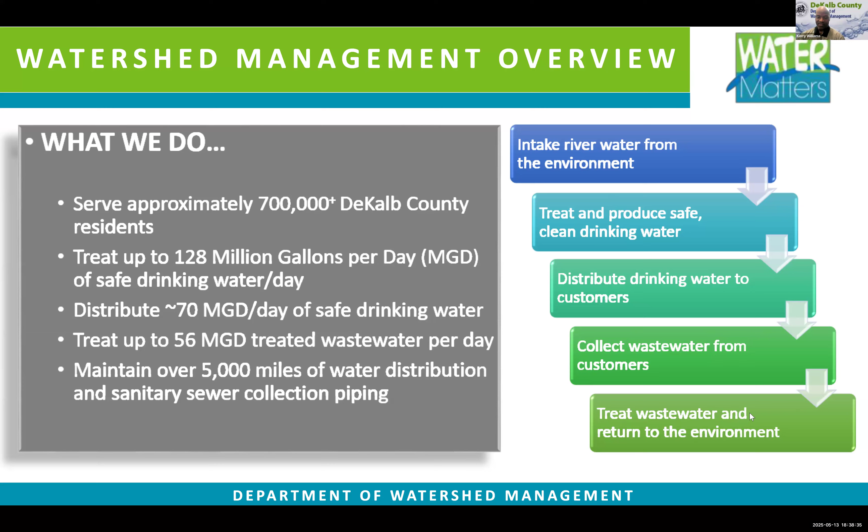This is part of DWM's effort to replace our aging infrastructure. Specifically, the pipes in this area, they were put in the ground roughly around 1957, and they have reached the end of their useful life. So we are being proactive to go ahead and start replacing these pipes in this area.

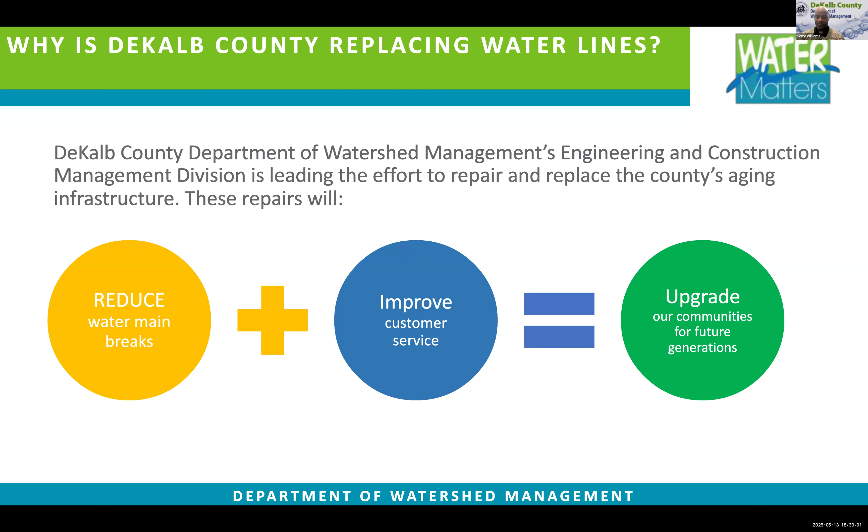To assist us, we have a team of consultants and contractors, AECOM, RGI. These help us on a daily basis in our design and construction of these projects. At this point, I'm going to stop talking. I'm going to turn it over to the construction manager, Assistant Director Ms. Cassandra Marshall. She will tell you more about the project and what we are trying to do to improve the distribution system in your area. Ms. Marshall, the floor is yours, and I'm going to be quiet.

All right, thank you, Kerry. Good evening, everyone. My name is Cassandra Marshall, and again, I am the Assistant Director of the Capital Improvement Projects for Watershed Management. My duties include overseeing the Watershed's $4.27 billion Capital Improvement Program and managing the construction management staff.

I have over 25 years of experience in construction management, and I'm supported by a team of experts also. So now you've heard a little bit about myself. I will now provide an overview of our problems with the system and our solution in repairing the aged infrastructure.

The problem is primarily due to excessive water main breaks, aged infrastructure, and operational inefficiencies. The pipe was put in 1957, and in this area, the county has been faced with over 59 water main breaks from 1989 to 2024.

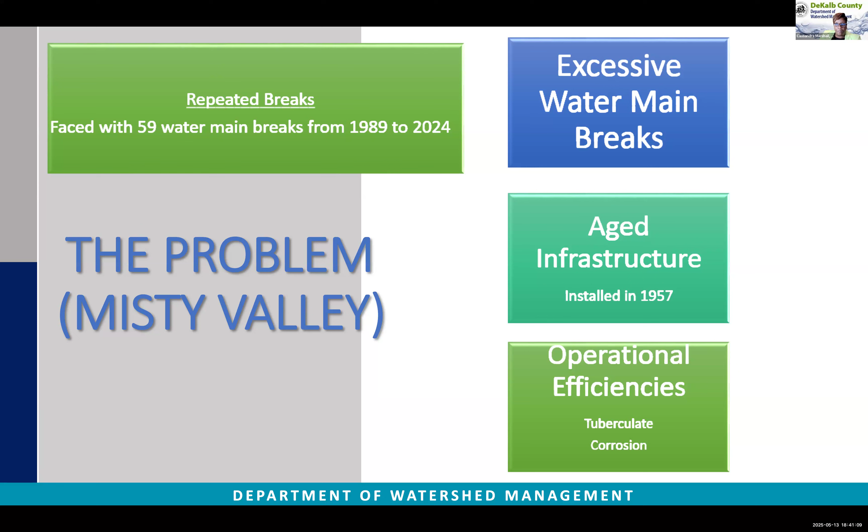So what does a CIP stand for? A CIP, or capital improvement project, is a project that helps maintain or improve an asset. It can either be new construction or a replacement of existing infrastructure.

Earlier this year, the Board of Commissioners approved a new CIP program for $4.27 billion for projects to be completed from 2025 to 2035. The Misty Valley Water Main Replacement Project is a $6.9 million project included within that plan.

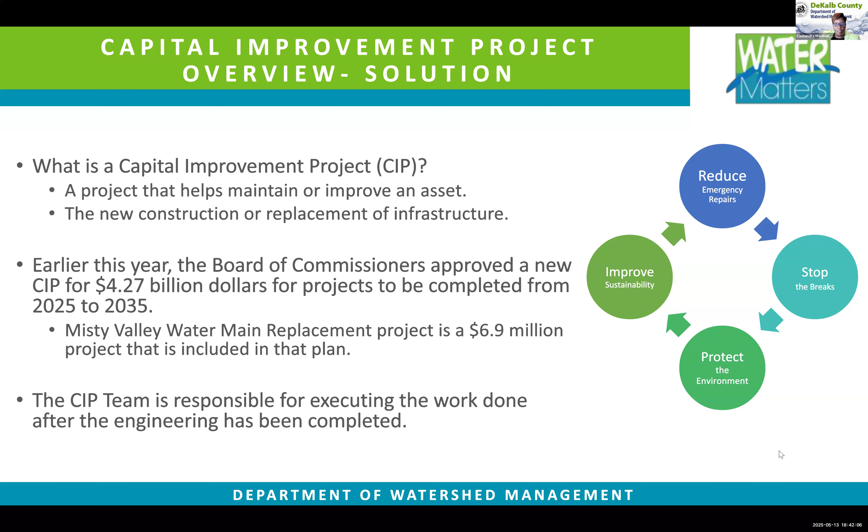My team, the capital improvement team, is responsible for getting the work done. My team includes 2 DWM construction managers and 12 licensed inspectors. Next up in the presentation, you will hear from the DWM inspection supervisor, Danny Mathis. He has over 30 years of experience in construction and is very well equipped to manage and oversee this project.

Along with our in-house staff, we are also supported by consultant firms who help assist the county with construction management and inspection services. So what the county wants you to know is we're here to help. We want to reduce or eliminate emergency repairs, stop breaks, and protect the environment. After we're done, this project should last a minimum of 100 plus years.

Next slide. You will now hear from Danny Mathis, the inspection supervisor for this project.

Thank you, Cassandra, for the warm introduction. Hello everybody, again my name is Danny Mathis. I am the inspection supervisor for the Department of Watershed Management. Next slide.

Misty Valley Road Water Replacement Project Scope. This plan includes installing 18,400 linear feet of 8-inch ductile iron water main pipe, including service laterals, hydrants, valves, pavement restoration, and raising water meter boxes to grade.

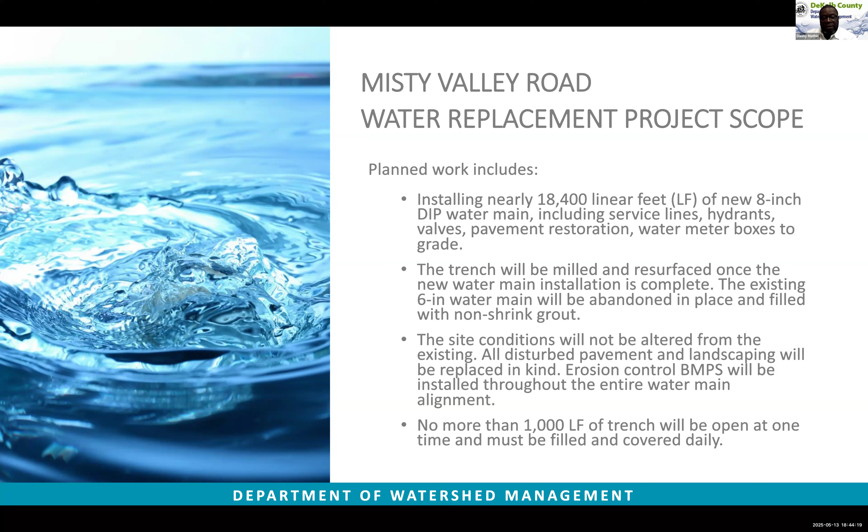Roads affected on this project: there are several homes, 200 to 250 homes, going to be impacted. The streets that are going to be impacted are Peachcrest Road, Sherrydale Lane, Phillip Circle, Misty Valley Road, Brookfield Lane, Glensford Drive, and Primrose Place. Next slide.

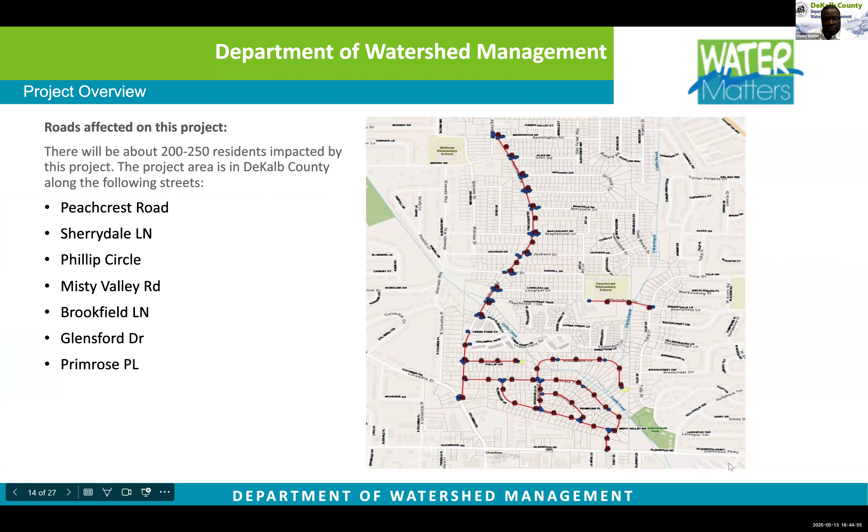Open cut is just a traditional method of trenching. It consists of cutting the asphalt, digging the trench, and installing new water line. The street will be backfilled and replaced with asphalt. Next slide.

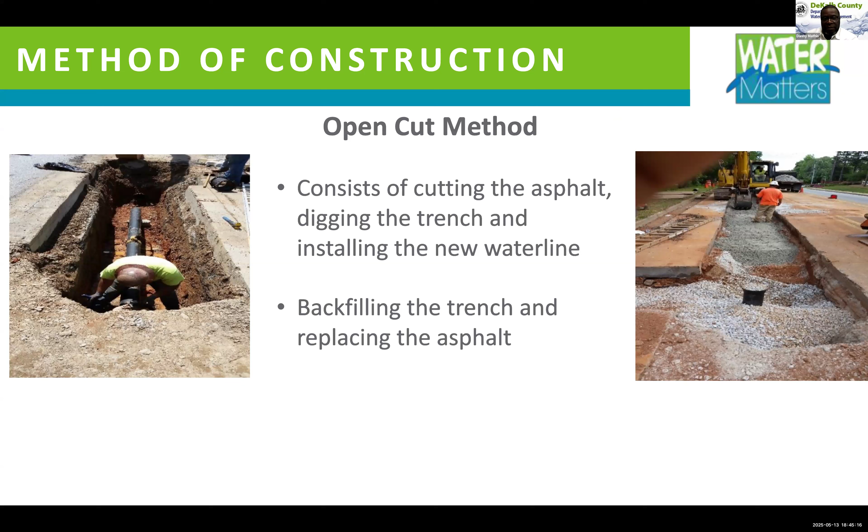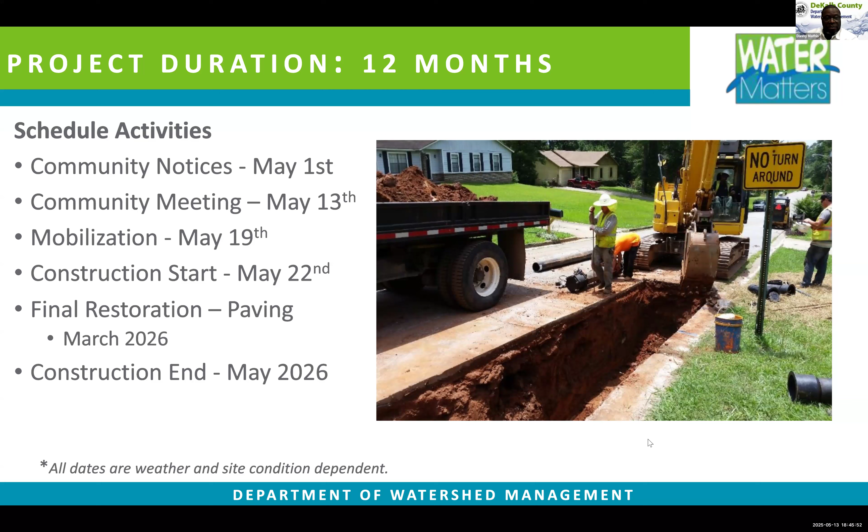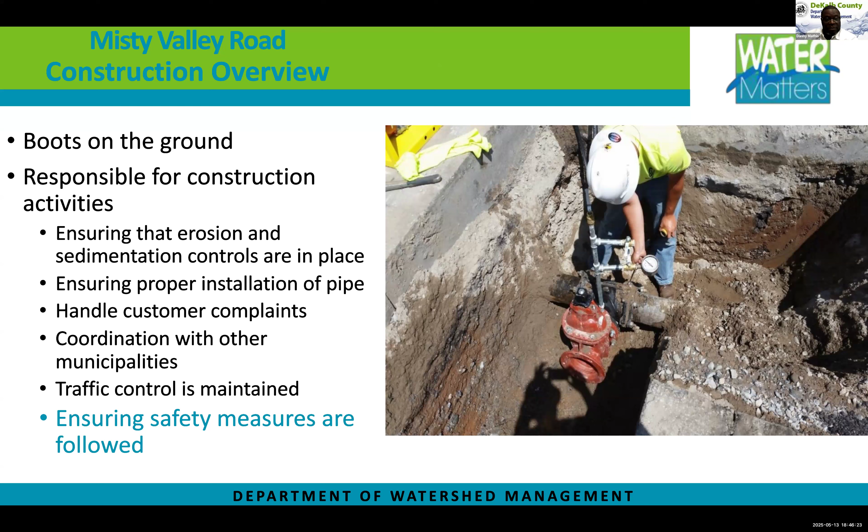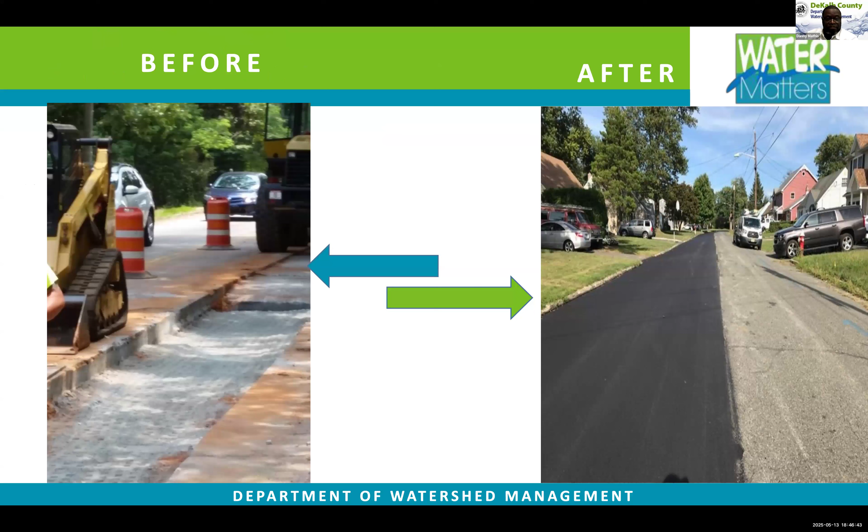This is just the before picture, before the pavement goes down. They're backfilling the street with some graded aggregate base, and then they're tamping the street. The picture to the right is the final restoration of the road. Next slide.

Now you will hear back from Ms. Cassandra Marshall. Thank you, Danny. I will now discuss community awareness.

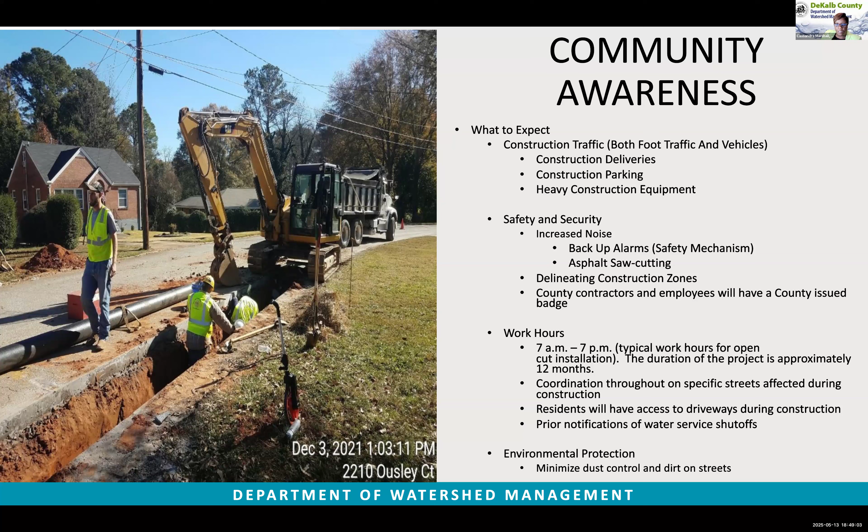For any planned water disruption, you would receive some type of notification at least 24 to 48 hours before the disruption. One last item you're probably going to see is silt on the street. However, our contractor is responsible for keeping streets clean and swept daily.

You will now hear from Ms. Alicia Penny about the public communications update. Thank you, Cassandra. Good evening, everyone. My name is Alicia Penny, and I'm the Public Relations Manager for the department. I've worked with the department for over 20 years, providing communications and community outreach.

Tonight, I will be sharing with you the ways that we will be communicating with you throughout this project.